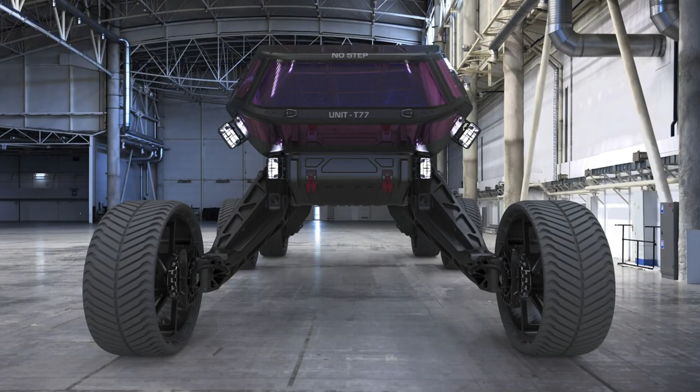TERRA Incognita Space Rover. The following is a creation by a Dutch designer with a very impressive portfolio. He has worked with 20th Century Fox, Netflix, Microsoft and other big companies, and today let's show you his rover for planetary exploration. The vehicle is called the TERRA Incognita Space Rover and is designed for a crew of 6 people.

To be reliable, the rover has 6 electric motors, as well as a modular architecture to make it easier to maintain and replace parts.

The combination of the specially designed compartmentalized hull and automatic systems provides a 72% chance of survival in an emergency, and the ASA system will allow the rover to navigate in 3-dimensional space and avoid dangerous maneuvers.

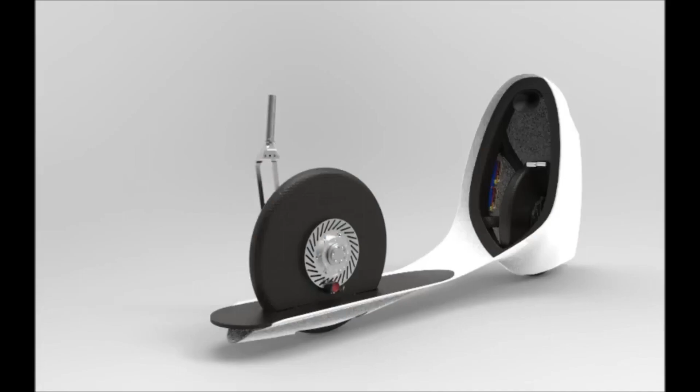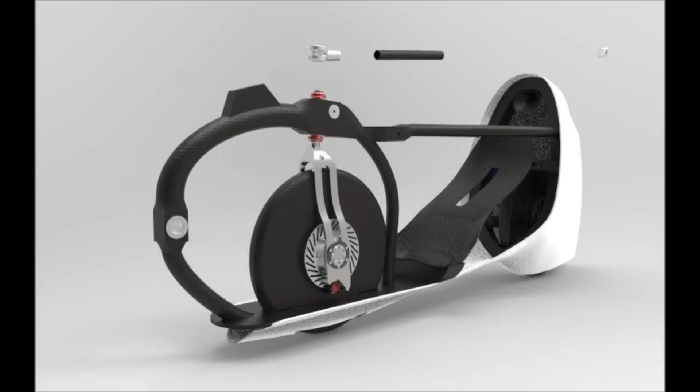In 2013, the Dutch team Human Power managed to hit 82 miles per hour. In 2015, the Canadian Aerovelo team went further, accelerating to 85 miles per hour. In 2016, there was a model called ETA that reached 90 miles per hour.

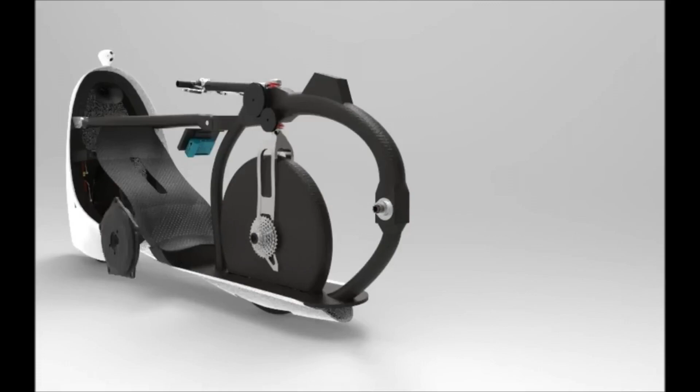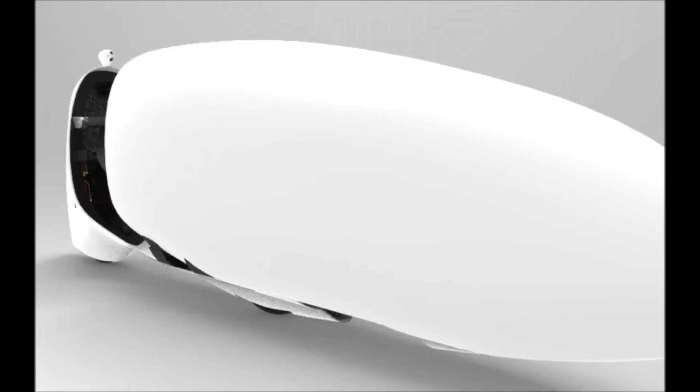The pilots are assisted by cameras as well as onboard computers that give indications at the right time. The materials include carbon fiber, and the drop-shaped design forces you to ride practically lying like in a Formula One car.

Alpine A4810 concept. The French have also managed to surprise us. Alpine engineers have joined forces with Italian design students and have unveiled a concept supercar powered by hydrogen. The model is known as the Alpine A4810, and the numbers were chosen for a reason.

4,810 meters is the height of Mont Blanc, one of the emblematic peaks of the Alps and the highest mountain in the European Union. In addition, Mont Blanc is located on the border between Italy and France.

Unfortunately, the model will not reach the markets. Actually it's a way to showcase the talent of the next generation of car designers, as well as paying homage to Alpine history. The design is inspired by Formula One cars, with active use of carbon fiber, and the combination of colors creates a contrast that highlights the most flashy elements.

TCL CSOT. Let's look at this brainchild of Chinese engineers. They make these screens that can be twisted and rolled up. They are very compact. The 17-inch OLED screen is only 0.2 millimeters thick.

There is also a tiny AMOLED screen that measures 6.7 inches and expands to 7.8 inches with a single touch. The cost of production is reduced by approximately 20%, which brings us closer to the massive implementation of these products. According to the manufacturers, the market potential is enormous, and by 2025 the market for smartphones with flexible screens will be 80% more profitable.

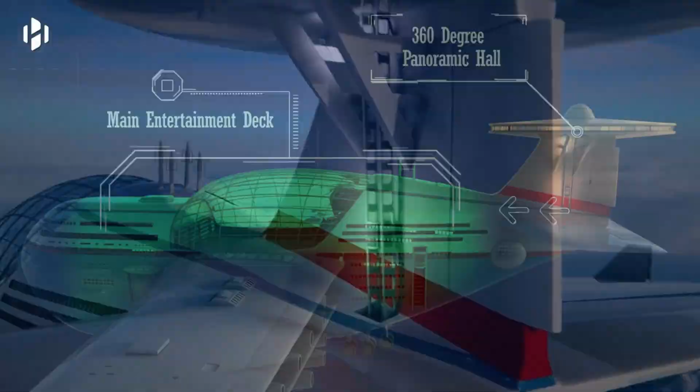These are just some of the features of the Sky Cruise project. The concept stands out due to its totally autonomous control. Simply put, no human pilots are needed. Visitors will be able to enjoy swimming pools, a shopping center, cinemas, gyms, and other services.

However, online users are skeptical. 'If physics and aerodynamics did not exist, this ship could take off,' says one of them.